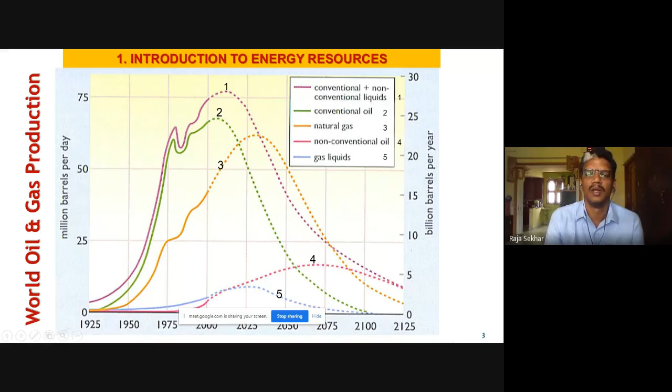As you can see in this graph, the purple line refers to the usage pattern for different years, spanning a century from 1925 to 2125. You can see that after 2000, there will be a decline in conventional usage because of the growing importance of alternate energy sources like renewable energy. And obviously the utilization of natural gas and other gas liquids will also be reduced in coming years as the global warming potential of the Earth is going to increase.

Coming to the consumption pattern, this is the global consumption pattern. Excuse me, sir.

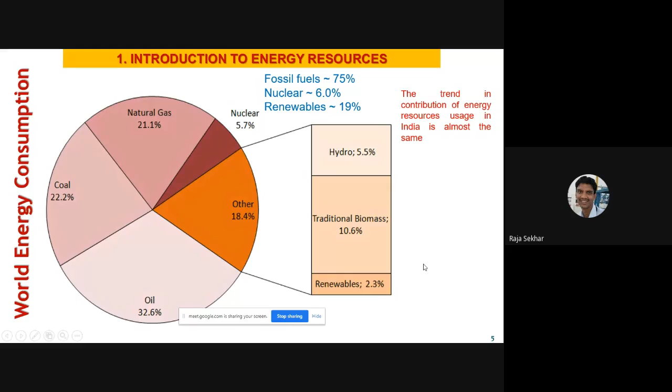Coming to the world energy consumption pattern, more than 50% of the energy is produced from conventional fuels. Around 32.6% is from oil, 22.2% is from coal, and 21.1% is from natural gas. So more than around 75% is from conventional sources. Around 5% is from nuclear, and renewables cover around 18.4%, which includes hydro, traditional biomass, as well as solar thermal and solar PV. The same usage pattern is followed in our nation also, with more than 60 to 70% coming from conventional power generation. That's why, since the last decade, the Government of India is trying to reduce coal consumption by encouraging renewable energy power generation through solar PV as well as biomass power plants, to save the carbon emissions released from different usage of conventional energy sources.

I want to specifically stress on the importance of solar energy in the global as well as the national context. This statistics has been taken from IRENA. This is the latest statistics published by them.

Looking at the installed capacity for the last decade, from 2010 to 2019, the trend of installation is going in an exponential way. The orange refers to solar thermal and yellow refers to solar photovoltaic. Most of the power generation is happening from solar photovoltaic rather than from solar thermal. I think you might understand the reason from Professor Reddy's words. There is a lot of scope for improvement in the commercialization of solar thermal power plants. There are some drawbacks which I will state in the rest of the slides. Majority of these installations, meaning majority of the power, is generated from solar photovoltaics.

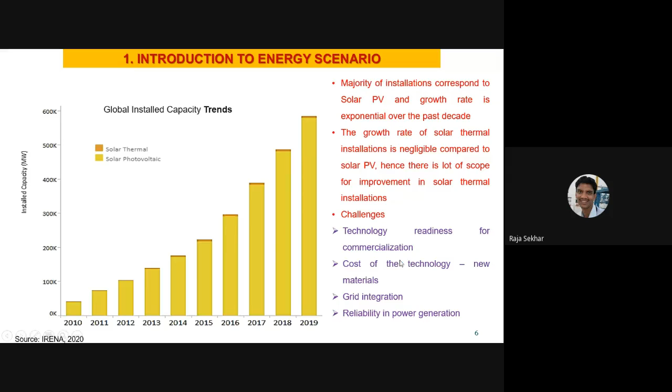Coming to the national installed capacity for India: in 2010, installation started, and by 2019 it really picked up because of various government policies. Solar photovoltaics in India also contribute more to power generation rather than solar thermal. On a global context, if you compare, India adds only up to 6% of the global total installed capacity during 2019. There is still a lot of scope for solar thermal installations to get commercial outlook.

In India, one of the challenges is that the amount of radiation falling from one location to another will change, and accordingly the physics of the system will also change. So we are yet to understand the physics of the system completely, in order to understand the generation capacities as well as the capabilities. There is a lot of scope for us to explore here.

So how can we exactly estimate this energy generation related to different locations of India? From Kanyakumari to Kashmir, there is a lot of latitude variation, and based on latitudes, the energy insolation will change. So how do these collectors behave for different latitudes? That has to be understood appropriately. I think that study is yet to start in India.

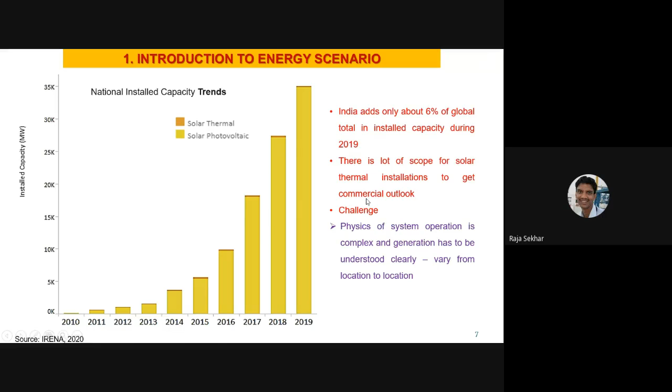Coming to global electricity generation trends, there is a consistent growth in the contribution of electricity from solar thermal power stations around the world. Some of the challenges here, as Professor Reddy also pointed out, are that energy storage is the biggest challenge, so along with generation, energy storage also becomes of primary importance.

There is no commercial energy storage technology which can be adopted appropriately for off-sunshine hours. So there is a lot of scope to work on energy storage to get cost-effective solutions.

Similarly, infrastructure components, design and development for transmission and distribution are also yet to develop. Why? Because the components used for a conventional grid are different from the components used for renewable-based energy generation. So there is yet to be a balance between this infrastructure requirement and the component design and development.

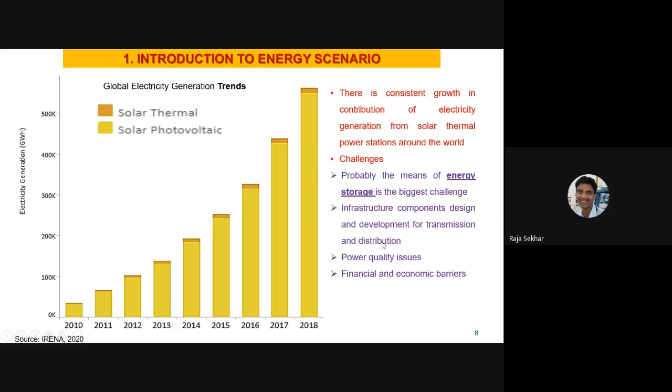Similarly, power quality issues can arise, and there is a financial and economic barrier, as these solar-based installations require a somewhat costly initial investment. The economic barriers are yet to be identified, and how to overcome these is a question. The Government of India and other federal governments around the world are encouraging renewables to some extent by providing subsidies, but people are not yet ready to adopt these technologies.

Coming to national electricity generation trends, during the past 5 years the growth rate is exponential. It adds to around 4% of the global total during 2019. You can see from 2017 to 18 there is an exponential growth in India.

Some of the challenges here are social and cultural barriers, and effective grid connectivity and integration to the conventional grid. The companies involved in power generation are slowly picking up, including our state-run organizations like NTPC and BHEL. Instead of building coal-based generation, they are now concentrating on building solar thermal or solar PV-based installations. BHEL, that is Bharat Heavy Electricals Limited, is now concentrating on the infrastructure that has to be built for the next generation of renewable energy-based power generation.

Then there is a lack of technology transfer from global industrial giants. As I said, only a few companies around the world are making these renewable-based technologies. If technology transfer takes place between companies, there is definitely a large scope for installing solar-based generation systems.

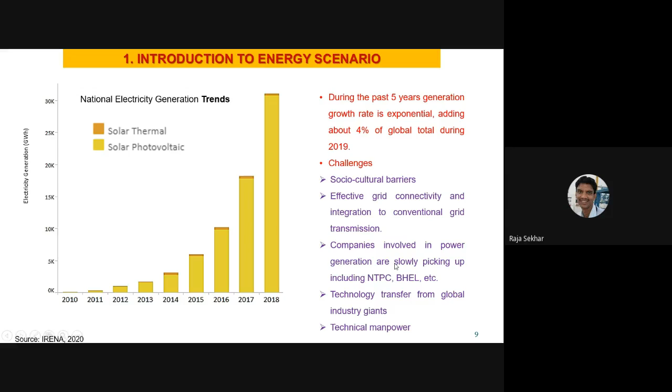Another challenge is the availability of technical manpower. You need trained manpower to operate these systems. Why? Because until now, training programs have been organized for conventional power generation. But for renewable-based power generation, you need more critical training so the plant can be operated without any hazards. This is one of the important aspects here.

Coming to the global job market for renewable-based power generation, from 2012 to 18 this is the data published by IRENA. You can see there is not much exponential growth; rather there is a slow growth.

So once these technologies are properly adopted, definitely I think there will be a large scope for the job market. So this job market for different energy sources has been listed here: hydro, wind, solar, biomass, and other resources.

Coming to only solar, you can see that the job market for solar PV is more compared to solar thermal. There are some ups and downs in the solar thermal job market because of the company's requirement, but however, the solar PV is constantly rising.

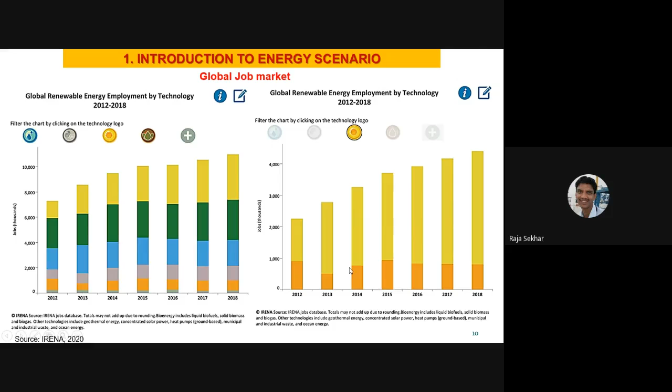Coming to the Indian scenario, India is able to give jobs for about 718.7 thousand graduates. Among that, solar is very less. So if these solar technologies have been appropriately developed for commercialization, probably this bar, that is solar heating and cooling...

This will also increase, and you can see that concentrating solar power is zero. In India there is no technical company which is commercializing concentrated solar power. If concentrated solar power had been given importance, this bar would have been in the positive direction.

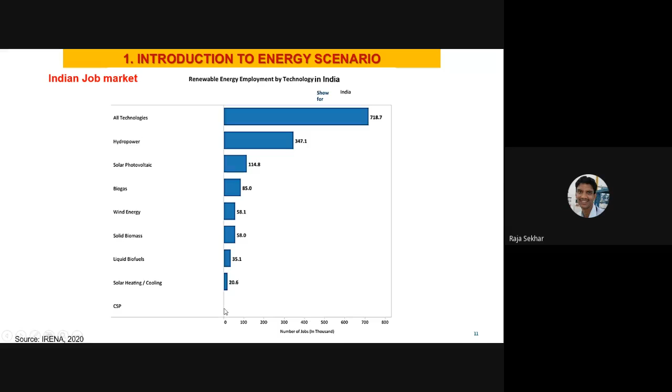Coming to the annual growth rate for the last 3 years, you can see that solar PV in 2018 was highest, and maybe during 2020 it got down due to this current pandemic. Wind is constant, with installations happening continuously, and bioenergy is also reduced in 2020 because of various reasons.

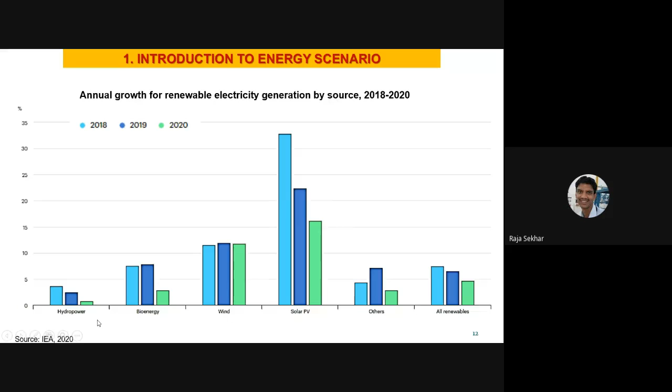Hydro also, since there are limited water resources in India, the market is slowly using whatever potential is there effectively. These are the statistics we can get from any source.

One major thing I want to stress here is that India is capable of producing 356,100 megawatts of energy in total, and from renewables it is around 123,040 megawatts. So still this gap between the conventional and renewables can be reduced by increasing the solar thermal installations.

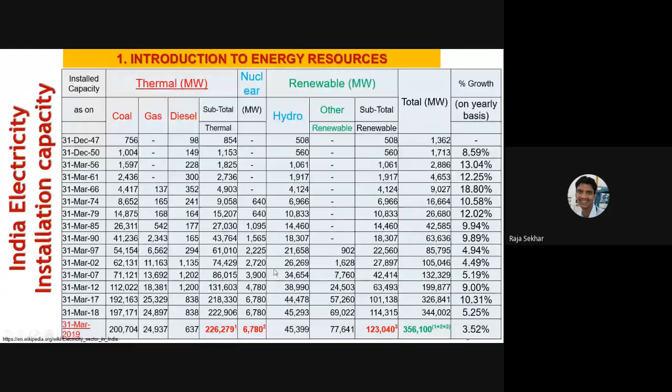Coming to the utilization of energy received, by different ways - this is in gigawatts, all the numbers are in gigawatts. We are receiving about 173 million gigawatts of energy from the sun, and out of which almost 1/3 is going back as reflective radiation in the form of shortwave radiation, which is reflected by clouds and whatever water is there in the atmosphere and the ice.

Most of that 1/3 is reflected in the atmosphere itself, and the rest, 2/3, the energy is transferring into many forms. Actually, whatever energy we are receiving, the same energy has to be radiated back, so that the Earth's atmosphere and surface temperature is maintained constant. If the energy we are receiving is not equal to the energy that is radiated, obviously there will be a change in the Earth's surface temperature, which is what is happening now.

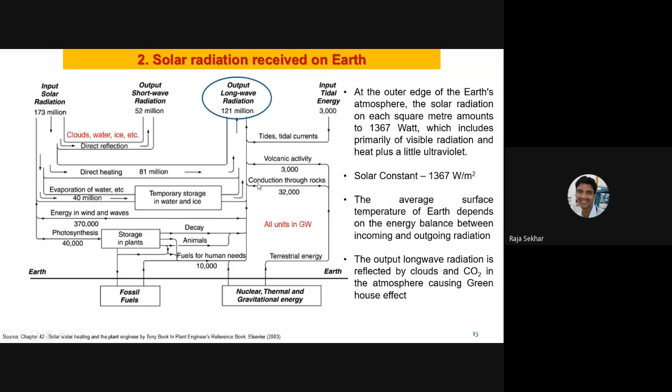Coming to solar thermal energy conversion, there are many conversion appliances. I will be concentrating only on the flat plate collector, which is a very useful application for water heating.

This schematic diagram explains the operating principle. This is the solar collector, which absorbs energy from the sun, and whatever cold fluid flows through it becomes hot, so you get hot water. The amount of energy absorbed depends on the area and the type of fluid sent into the collector. Basically, this collector converts incoming solar radiation into thermal form.

Another advantage is that it can use both beam and diffuse solar radiation. This is a stationary collector, so it does not require sun tracking, unlike concentrated systems. The construction of this collector is also very simple.

It is cost effective. In the morning session, some people asked if it is very expensive, but it is not. All state governments give enough subsidies to purchase these renewable devices, especially in Karnataka, where they provide almost 50% subsidy. So if you are ready to purchase this, they provide 50% of the installation cost.

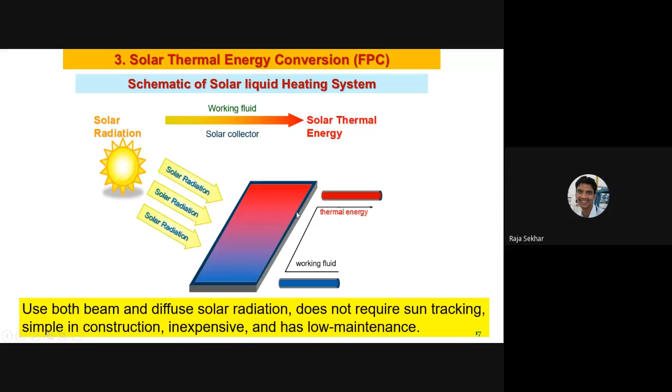Coming to the different components of this collector, there is a collector box made of metal, and the light blue colored parts are the risers, which are around 1 inch in diameter. There is a bottom header and a top header, and between these headers there are riser tubes.

The bottom header is where you get cold water, and whenever the sun's rays fall, there is an absorber plate. This absorber plate absorbs the solar energy and is coated black in color, since black surfaces absorb more heat.

The heat absorbed by the collector is given to the riser tubes, so slowly the water gets heated up. Because of this thermosiphon effect, the water moves into the top header, and then you can get hot water at the outlet.

This is connected to a storage tank, and there is glass over the whole system. The advantage of this glass is that it transmits short wave radiation but restricts long wave radiation. As mentioned, most of the incoming radiation is visible, some part is short wave, and the rest is long wave radiation.

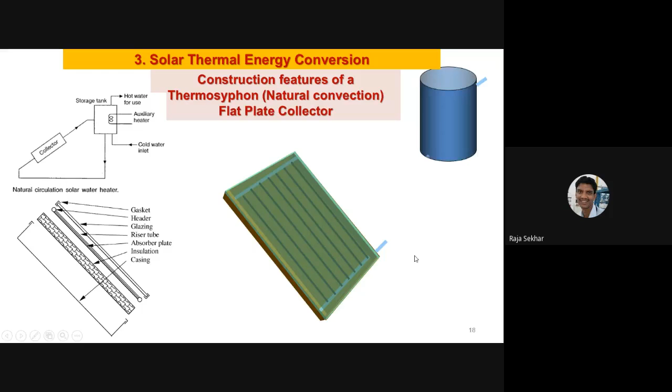What I have explained so far is about natural circulation, meaning the water passes through the collector by gravity. Another mode of operation is to have a pump at the bottom header, so that the water flows in a faster way.

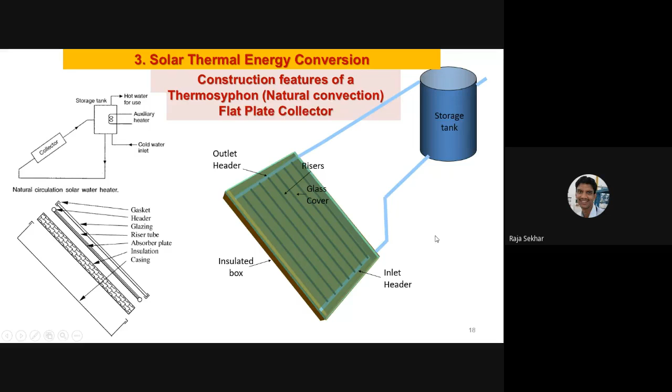And you have different absorber configurations also. So as Professor Reddy has told, there is transparent insulation. So this is how the transparent insulation will be there - there will be a gap between the glass and the absorber plate.

In between the glass and absorber, some transparent insulation is provided so that heat losses are reduced. Why is this transparent insulation provided? Because there is a temperature difference between the glass and absorber. The glass, since it is exposed to the outside environment, will be at a lower temperature. And since the absorber is continuously getting heat, the absorber plate will be at a higher temperature. Heat transfers from higher temperature to lower temperature, so there will be re-radiation happening from the absorber plate to the glass cover. To avoid that, transparent insulation is provided so that heat losses are reduced and heat transfer is improved.

So you can say that providing the transparent insulation over the absorber is also one type of passive enhancement. This is the standard flat plate collector, where insulation is provided on three sides, and you have a roll bond absorber. That means this absorber plate acts as a fin. When the fluid passes through this tube, the absorber plate gives heat to the fluid, and the fluid gets heated up.

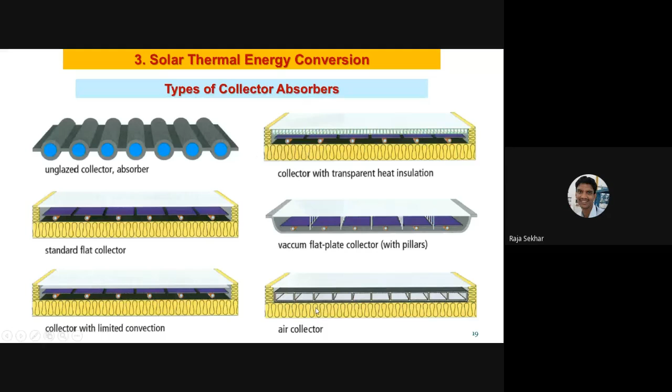Similar to water, we can have air also pass through this collector for getting hot air for drying systems. As I told, you can use a pump for circulating fluid so that it acts as forced convection. The advantage with forced convection is that in natural convection, the number of cycles the water passes through this collector is limited - it all depends on how the radiation varies.

So actually, this is a closed circuit, whether it may be forced circulation or natural convection - the whole fluid circuit is a closed loop. So whenever this cold water gets heated up, that means some mass of water has been pushed from this collector, and the same amount of mass will come and occupy the fluid inside the collector. That's how the natural convection works.

However, in this forced circulation mode, the pump forces the fluid to pass through the collector. So the advantage here is that the number of times the fluid comes in contact with the collector will be more. So you can ask one thing - whether you will be getting a higher temperature at the outlet.

Definitely not. Why? Because the time that the water is retained in the collector is less in this forced circulation. That means the fluid passes very fast through the collector tube, so the time available for heat absorption is somewhat less. That's why the collector outlet temperature is less in forced circulation compared to natural convection. However, if you want to heat more amount of water within less time, then definitely this forced circulation will be used.

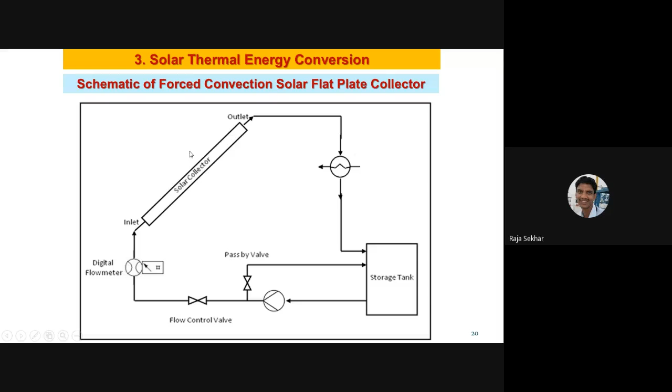So on what factors does this efficiency depend? One of the factors is the incident solar radiation. As I said, the input that you are giving to the collector will play an important role. You know that efficiency is output by input, so as your input varies, your output will also vary.

To find out this efficiency, you need to know what is the radiation falling over the collector. You can do that with the help of meteorological parameters like ambient air, wind velocity, average temperature over that location, rainfall and other aspects. If you have a weather station, you can take the data of a few years and come up with the radiation possible over that location. Based on that, you can find out what the efficiency is.

So the data, whatever you collect, you can develop a regression equation based on the ambient temperature, wind velocities, rainfall, and other things, and you can easily get what is the radiation possible over that location. So the difference between this incident radiation and the useful energy is the amount of energy lost to the atmosphere.

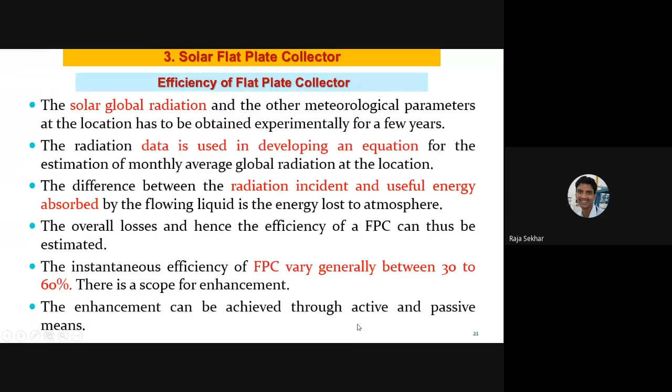Coming specifically to passive augmentation techniques, a few techniques are listed here. There are many, but a few which we are working on are listed. So altering the thermo-physical properties of the working fluid - basically the mode of heat transfer happening in the collector is convective heat transfer, that is MCP delta T.

So that CP, if you change it - CP is nothing but the amount of energy you can gain by raising the temperature of fluid by 1 degree. So if you are able to raise the CP of water, more amount of energy you can retain. For that, you can take the help of nanoparticles.

I think in the morning somebody asked whether nanoparticles can be used for enhancing the efficiency. Yes, definitely, so this is what I am going to cover in the further slides. We can use the nanoparticles by developing the nanofluids, using different nanoparticles to develop different nanofluids.

You can use the fluids either in laminar or turbulent flow. Laminar corresponds to natural convective heat transfer, and turbulent corresponds to force circulation. There are a lot of drawbacks of using these nanoparticles in laminar conditions, because basically the density, viscosity, and other properties will change. Because of which, in a laminar condition, there may be a possibility that the rate of fluid flow can reduce.

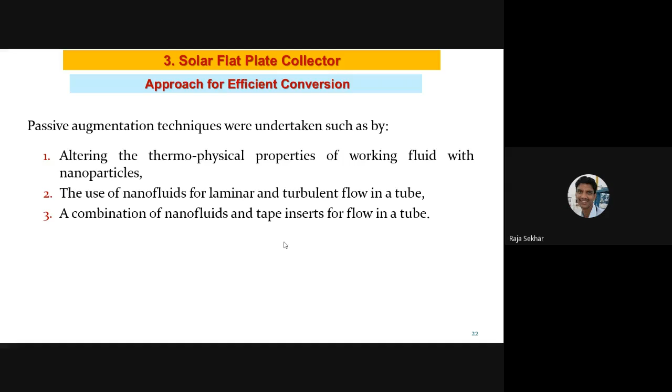A combination of nanofluids as well as other passive techniques, like putting tapes into the flow, is also a good idea to improve heat transfer. If you put a tape, the flow circulation will change. If you take a plain pipe and send fluid, it goes in a straight line, whereas with tape inserts, based on the shape of the tape, the fluid circulation will increase, and there is a possibility that the tube surface can provide enhanced heat transfer to the flowing fluid.

Coming to the first part, that is parametric analysis of the flat plate collector. We have studied the influence of different operational parameters on the efficiency of the collector. Wait a minute, I will have some water.

The solar radiation passes through the glass cover at an inclination to the surface. At one particular location, if you change the inclination of the collector, the influence of this inclination on collector performance is studied. Then the amount of energy absorbed by the collector absorber plate, and the energy transferred to the flowing fluid, under thermosyphon and forced convection modes.

Usually the plate temperature is greater than ambient. So for different plate temperatures and different ambient conditions, how the performance will change was studied. There are already established equations, and we modified those equations slightly for our requirement. Also, for different ambient and wind conditions, if the collector is exposed, what will be its effect. Then what happens if the spacing is changed?

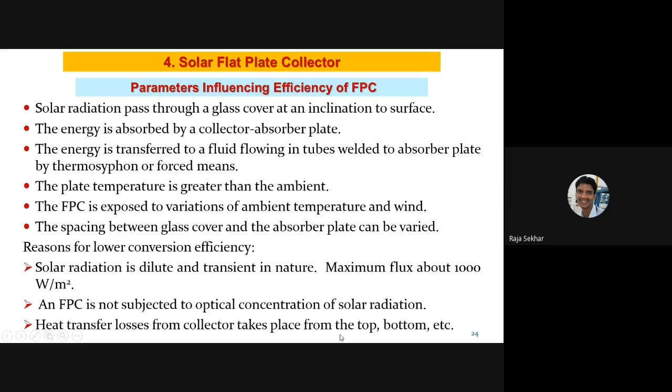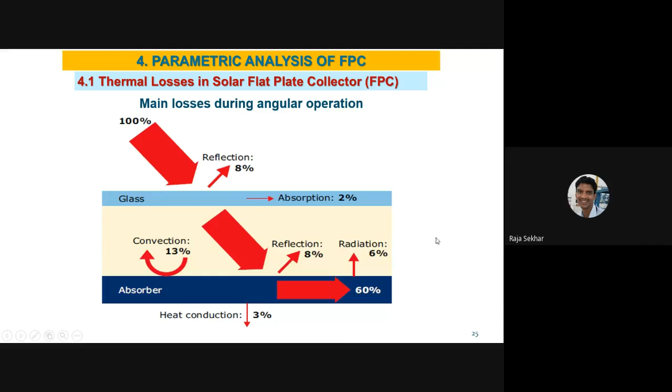So corresponding to all the losses, the efficiency of the collector is somewhat reduced. These are the different modes of heat transfer happening in the collector.

Q sun is the incident heat energy received on the collector. Some of the heat is emitted, some is lost due to wind flow, and some loss happens because of conduction. So different losses are there - conductive, convective, and radiative losses happen because of various reasons.

For conductive loss, though you provide proper insulation, you may not say it restricts 100% of the loss. Some convective losses happen because of the air presence between the glass and the absorber, and radiative losses happen from the absorber to the glass. So different losses happen, and we need to find appropriate ways to reduce the heat loss.

Basically, our aim has to be to transfer the heat that is absorbed by the absorber plate to the fluid. That means you need to maintain the absorber plate temperature as low as possible, so that you can get the heat transferred to the fluid.

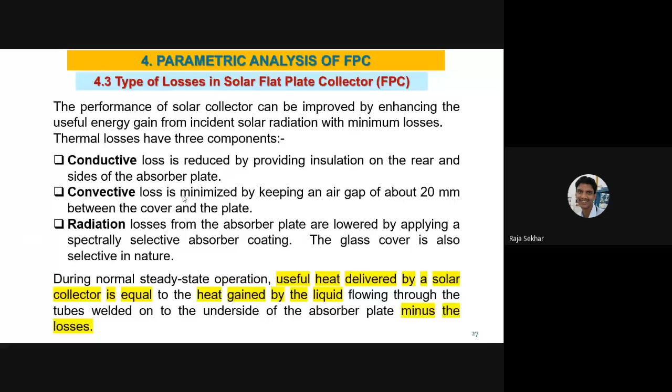If you use these passive enhancement techniques, it should result in lowering the plate temperature for the same condition. Let's say you have one reference flat plate collector and another flat plate collector including these enhanced techniques. If you compare those two, the absorber plate temperature of the reference should be higher, and since you've incorporated passive enhancement techniques, the absorber plate temperature will be somewhat lower than the reference. Why? Because more heat has been transferred to the fluid, so the absorber plate temperature has been reduced. That is our main objective.

So we can understand this energy balance of the flat plate collector. These formulas are already available in many textbooks. Q useful is the amount of heat absorbed by the fluid - the useful heat delivered by the collector - and S is the amount of energy absorbed by the absorber plate because of the incident solar radiation. As the area of the absorber plate increases, more heat can be absorbed, so your collector performance also indirectly depends on the area of the absorber.

QL is the heat losses occurring because of various modes of heat transfer like convection, radiation, and other things. At the denominator of this efficiency, you have the incident solar radiation, which you can calculate using this formula. Since the surface is not horizontal but inclined, you have so many other components coming into the picture. The solar flux absorbed by this inclined surface is given by this formula.

We have this tau alpha coming into the picture - tau alpha is nothing but the transmittivity and absorptivity of the collector. If you want to find the instantaneous efficiency, that means at one particular instant keeping all parameters constant, it is given by this formula: QU by AP into IT. The area of the absorber plate is constant, however your QU and the incident radiation will change according to the different operating parameters.

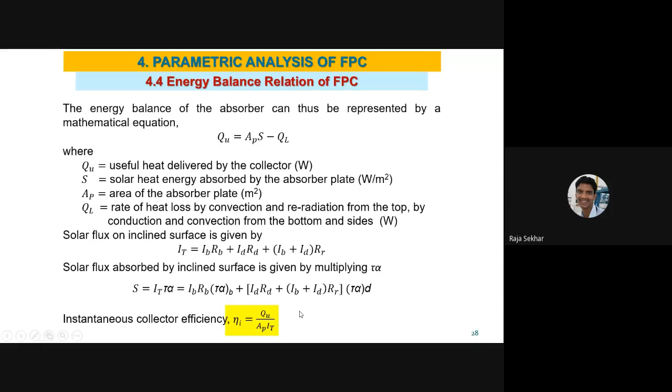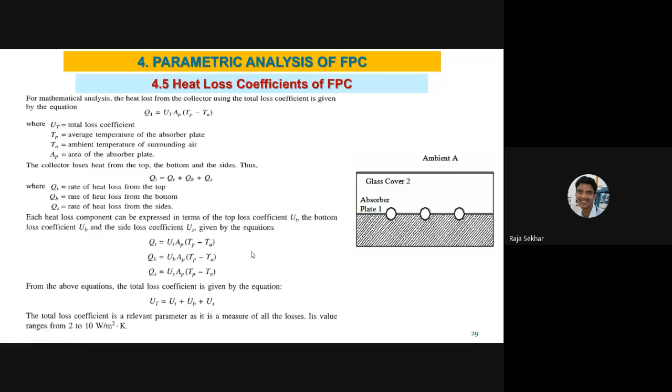Coming to these heat losses happening because of various reasons, you can use the appropriate equations to find that out. I'm not going into more details, as these are already available in the respective textbooks.

So what we have done is consider the main important influencing parameters that cause change in the practical performance. The parametric collector absorber plate temperature has been varied from 310 to 390 - these values we got from reference papers, where people have experimented and identified that the absorber plate temperature can be in this range.

Ambient temperature, based on our local conditions, we have considered this as the average ambient temperature. Absorber plate emissivity we have changed from 0.05 to 0.95. Why this change? 0.05 means we have some proper selective coatings where the emissivity of the absorber plate is reduced to 0.05, and 0.95 is the emissivity of an absorber plate coated with normal black paint - whatever commercial paints you get, if you paint it, the emissivity will be 0.95.

With selective absorber coatings, emissivity comes around 0.05. Usually black bodies absorb and emit more, so you need to appropriately change the properties of the paint such that emissivity is reduced to around 0.05. This emissivity has also been prescribed by the Bureau of Indian Standards. The glass cover emissivity is usually 0.88 because of the material property, and this we cannot change. The angle of inclination we have varied from 20 to 80 degrees, and we have considered both one and two glass covers.

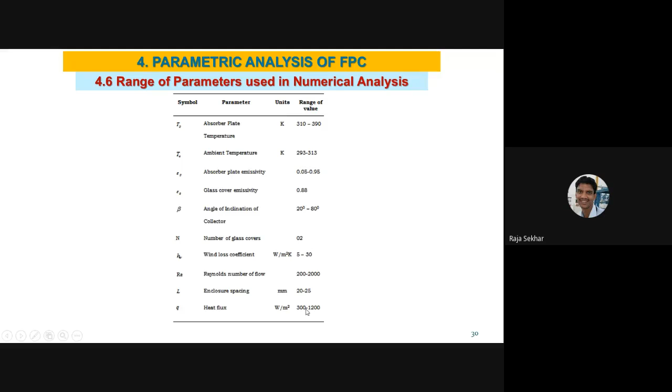These are the results. But before that, we had to do some validation to check our numerical code. So we developed a numerical code and validated it against available experimental data.

We varied the emissivity of the plate from 0.05 to 0.95. When we applied our own experimental data, which we performed ourselves, the emissivity came out close to 0.1 to 0.05, which implies that the coating provided to the collector is a selective coating.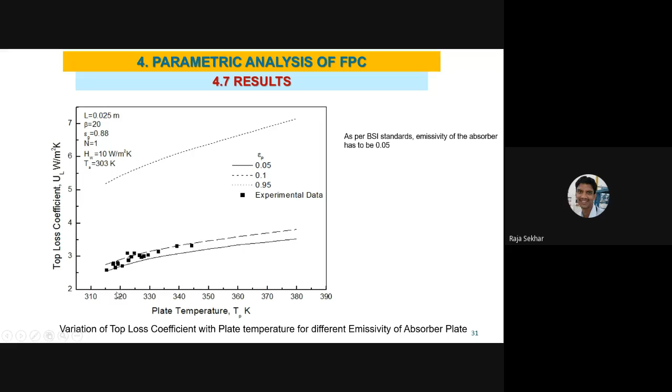From this graph, you can see that the higher the emissivity of the absorber, the higher the top loss coefficient will be. As shown in the previous equations, this top loss coefficient U is the major contributor to losses. So the more the emissivity of the plate, the more the losses. One criterion is that the emissivity of the plate should be as low as possible to reduce the top losses. We cannot make it zero, but we can reduce it to a maximum extent. Whatever the plate temperature, the losses will be reduced if the emissivity is low.

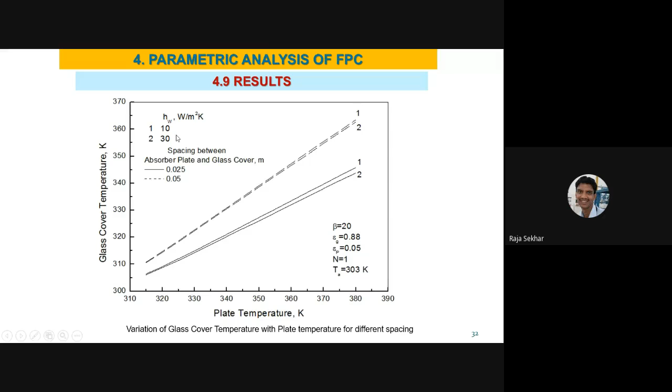We also studied what happens if the spacing and wind loss coefficient change. We can see that for 0.025, that is a 25 mm gap, the losses are reduced. If you increase the spacing, the losses increase. Similarly, we can see that losses are lower for lower wind loss coefficient (h_w).

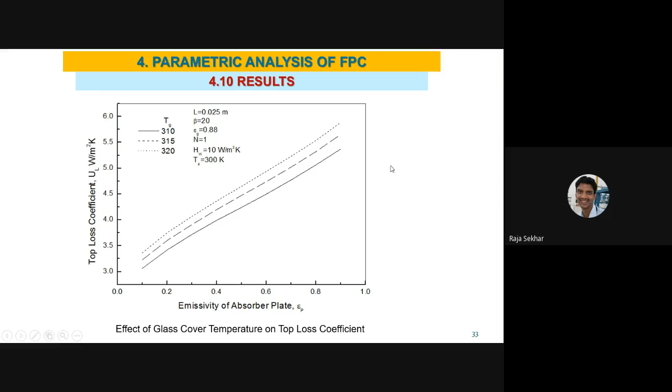Similarly, for 20 degrees inclination, glass emissivity of 0.88, and one glass cover, with ambient temperature of 300, if the glass temperature is varied, what happens to the loss coefficient? You can see that if the glass temperature is lower, the losses are less. If the glass temperature is higher, the losses from the top are more. The reason is that if your glass temperature is higher, the wind will try to take away the heat from the glass, so more radiation will come from the absorber to the glass. If you maintain a lower glass temperature, the possibility of losses is reduced.

Similarly, for different plate temperatures, you can see that if the plate temperature is lower, around 315, with ambient temperature taken as 303, then if the temperature difference between ambient and plate is less, the losses are less. But this condition cannot always be attained, since the temperature difference between ambient and plate will usually be more than 20 or 25 degrees, because of the material property of the plate.

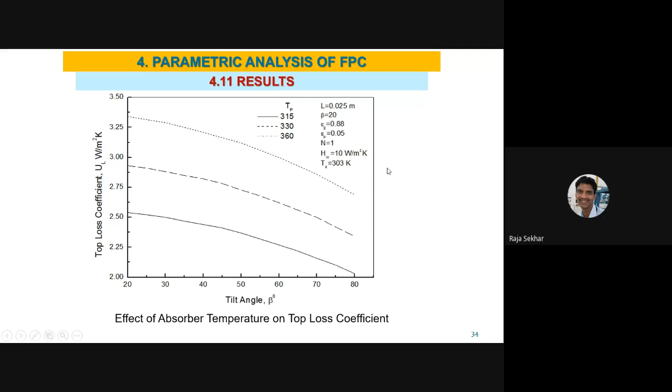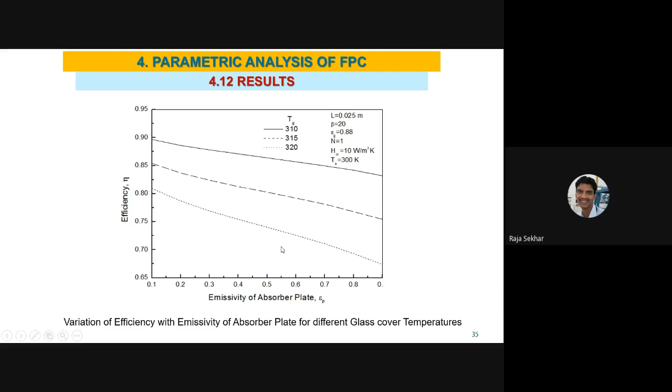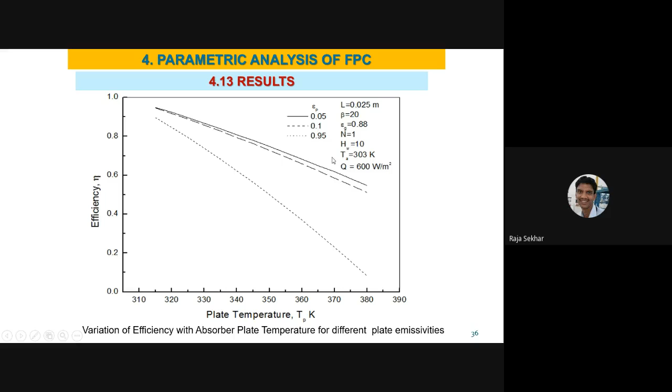Similarly, how does efficiency vary for different glass temperatures? You can see that if the glass temperature is maintained higher, efficiency is lower, and if the glass temperature is maintained lower, efficiency increases. For different absorber plate emissivity, the lower the emissivity of the absorber, the higher the efficiency. Similarly, we also studied the case of changing plate emissivity: the lower the emissivity, the higher the efficiency for different plate temperatures. So like this, we have studied various cases.

I think the time is now 12:44, and there are many more things to discuss. May I know up to what time I can go for?

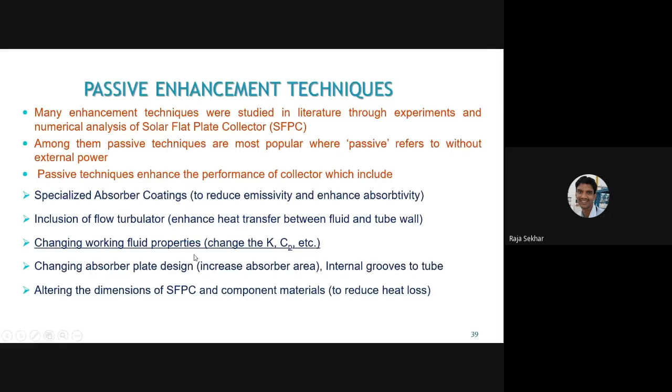As I said, you can use nanofluids as the working fluid. One drawback of using nanofluids is that, though you increase the heat transfer rate and efficiency of the collector, you obviously have to go for a heat exchanger type storage tank, because you cannot use nanofluids for bathing or cleaning utensils. Whatever heat is gained by the nanofluid has to be transferred into the water in the storage tank, and only that storage tank water can be used for normal purposes. So the other requirement for using nanofluids as working fluid is that you have to go for a heat exchanger type storage tank.

Whereas in a normal collector, the water you use flows over the collector directly. But since the heat transfer rate of water is lower than that of nanofluid, using nanofluid can improve the efficiency of the collector. We can use different types of nanoparticles like Al2O3, SiO2, copper oxide, copper, and other particles for preparation.

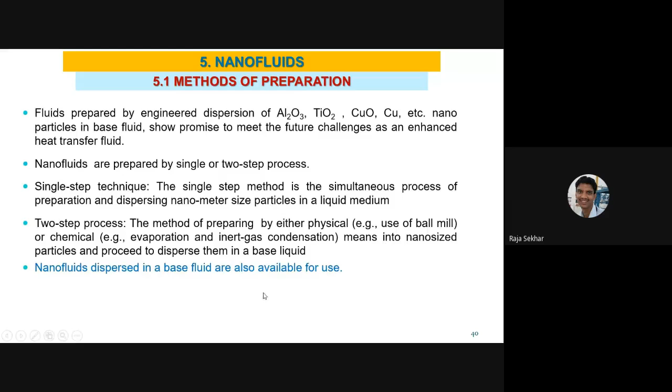You can prepare these nanofluids by either a single-step or two-step process. I think I am losing time, so let me just go through it. This work was conducted along with my collaborators in Malaysia, where the actual experimentation happened. They prepared different SiO2 concentrations.

This is very important: while preparing nanofluids, you have to compromise between thermal conductivity, density, and specific heat. If you go for copper, it has a specific heat of 386, but its density is 8,954. However, for SiO2, the specific heat is 745, almost double, but its density is about 4 times lower, at 2,220. However, if you compare thermal conductivity, copper is 383, whereas SiO2 is only 1.4.

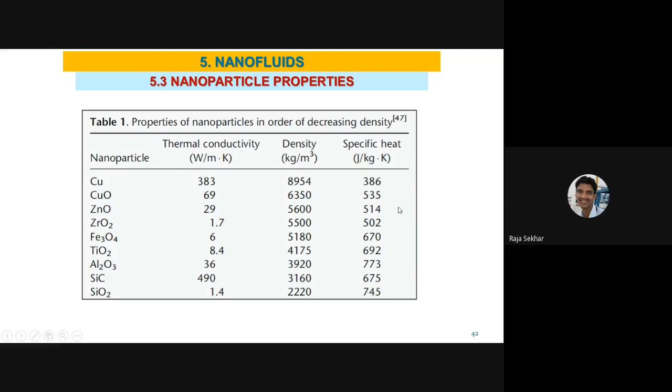What I want to stress is that if you want to prepare your nanofluid, you can use a small amount of copper to get more heat transfer because its thermal conductivity is higher. However, if you want to use SiO2, the concentration has to be more, because its thermal conductivity is lower, but its specific heat is higher, meaning it can store more heat, but the heat transfer rate is lower, so you need more SiO2. On the other hand, based on density, the more the density, the more the viscosity. So you need a compromise between all three properties while choosing your nanofluid.

You can estimate the properties using these established relations. Along with the collaborators, we finalized these parameters based on standard deviation, checked with other literature data, and finalized these regression equations. Thermal conductivity depends on phi, the volume fraction of nanoparticles added to the fluid, the temperature of the fluid, the diameter of the particle, and the thermal diffusivity. Alpha P is the thermal diffusivity of the particle relative to the thermal diffusivity of water.

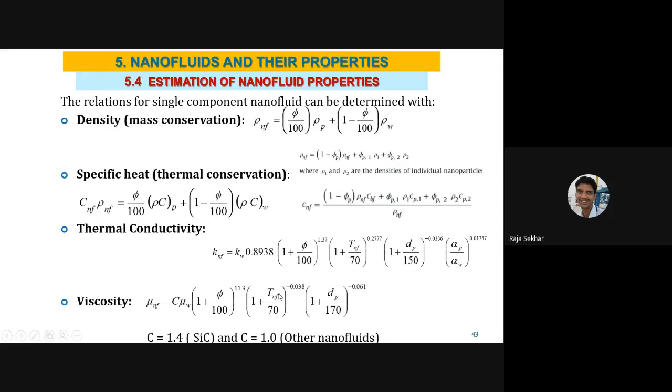Coming to viscosity, here also if the diameter of the particle is more, there is a possibility that viscosity may increase. And the temperature, obviously, if the temperature is higher, the viscosity will be lower.

Some of the considerations that people have taken are: nanofluids are Newtonian in the low volume concentration, and thermal conductivity increases with concentration and temperature. Viscosity increases with concentration, and it will obviously decrease with temperature. Specific heat and density of nanofluid are determined based on law of mixtures.

So I have a few questions so that you can understand it better. I think I have shown some equations, so we can just get answers for ourselves. What are the nanofluid properties which are dependent on particle size? Maybe I will share this PPT later to the organizers, so they will give this PPT to you, and later you can find out the answers for these questions.

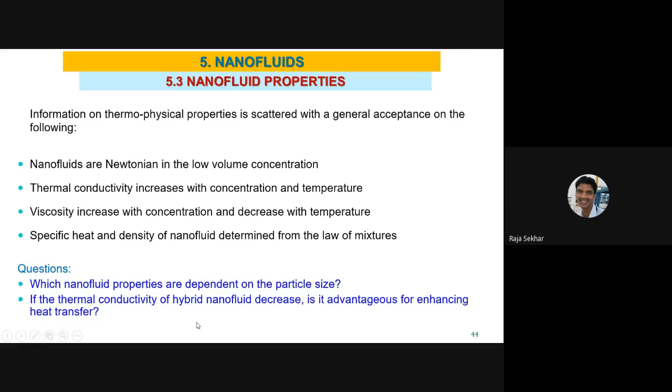What is the effect of nanofluid under natural convection? As I said, there are very few studies people have done on this enhancement of natural convection with nanofluids. What people have identified is that when the nanoparticle is added, the heat transfer rate is decreasing in natural convection mode. Usually, if you add nanoparticles, people have a wrong view that the heat transfer will enhance.

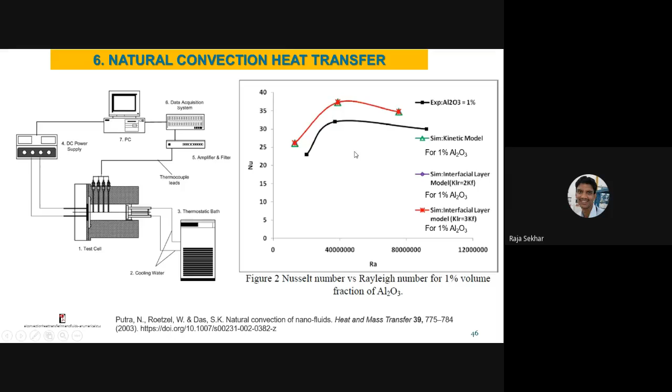Also, you can see this is the trend for experimental values. It is from 20 to 30 for 1% volume concentration. For 4%, you can see that it is further reduced. So the more the concentration you add in natural convection, the Nusselt number or the heat transfer rate is decreasing with increasing particle concentration.

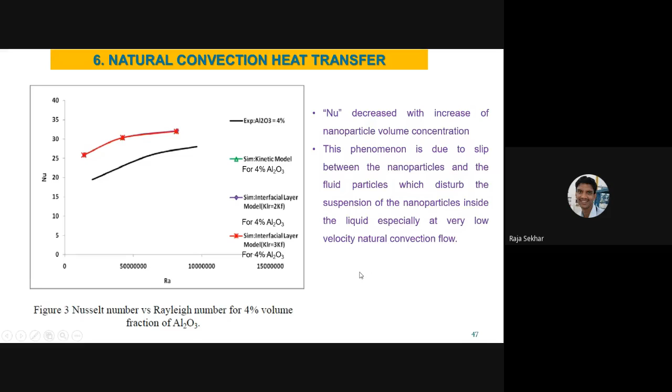The reason that people have told is due to the slip between the nanoparticles and the fluid particles, which disrupts the suspension of nanoparticles inside the liquid, especially at very low velocity happening under natural convection flow. Similar tests have been conducted by many researchers.

Using not only Al2O3, but also multi-walled carbon nanotube based nanofluids, they observed the same trend by increasing this concentration.

This is done on a real flat plate collector. They have identified that the efficiency is increasing, but we cannot compare this efficiency with the heat transfer rate when you are using these nanofluids.

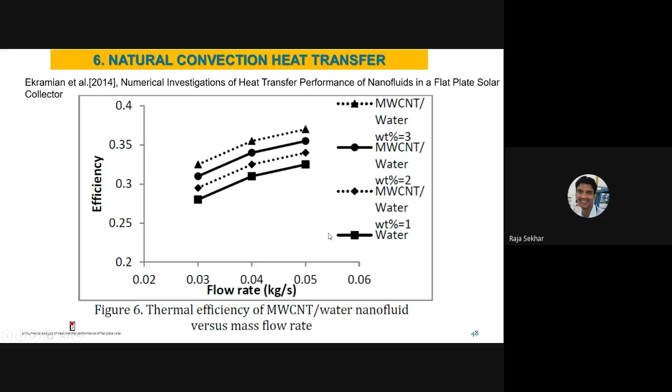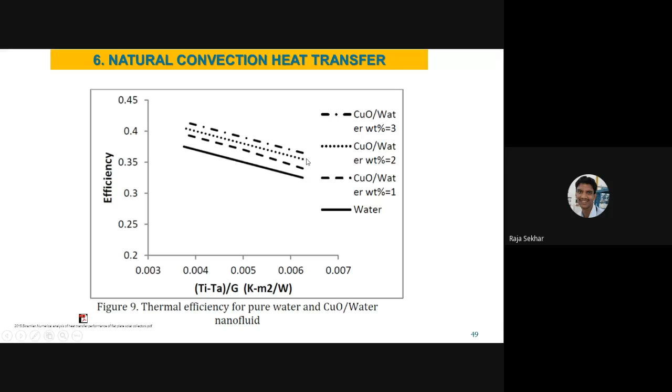They have done it for CuO-water also, and they identified that the efficiency is increased with adding more nanoparticles, but not the heat transfer rates. They have done this for Al2O3 also. So there is a small variation between the change in efficiency, but definitely the efficiency of the collectors changes.

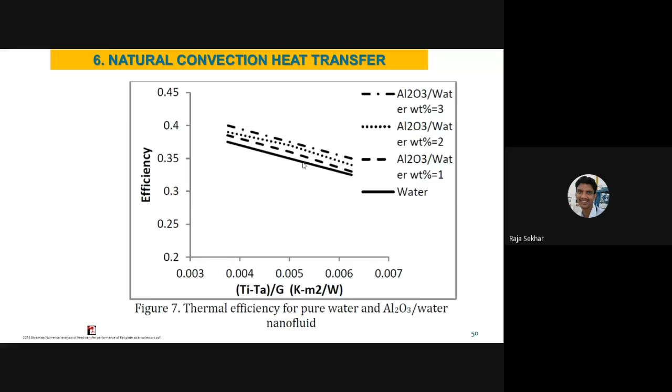So, yeah, this is for natural convection heat transfer only, not turbulent.

One of our collaborators has done this work, and he made a test section having a heating chamber on one side and cooling chamber on the other side. This is the test section in which the fluid is sent under natural convection, and they identified what will be the effect of this.

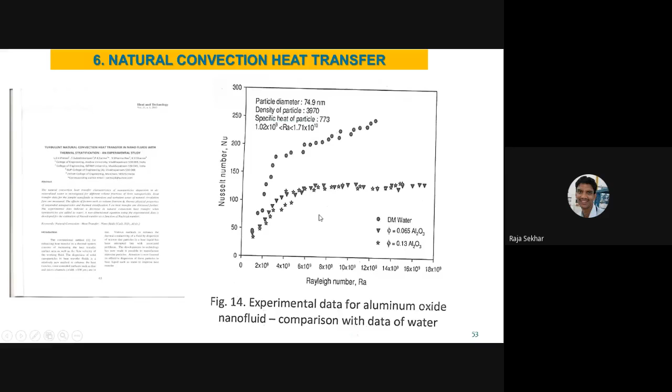They made a set of experiments and identified that water has a higher Nusselt number compared to the nanoparticles. Here you can see these circles are for water, and triangles and star ones are for nanofluid. They observed the same thing: compared to water, the heat transfer rates are reducing with adding nanoparticles to the base fluid under natural conditions. The same trend is observed for TiO2 also.

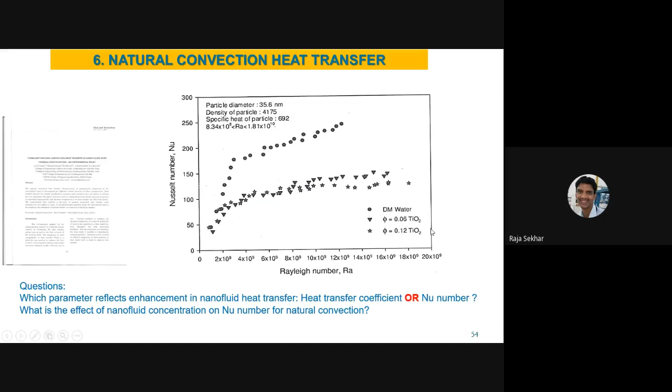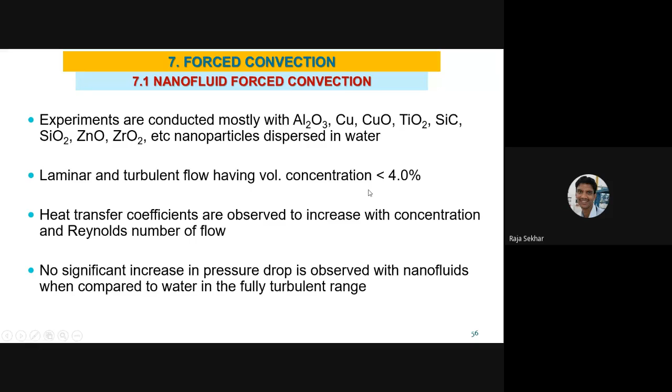So coming to this forced convection, people have done the same fluids for Al2O3, copper that have been used for natural convection. One important thing you have to understand is that if the volume concentration is less than 4, then only the heat transfer rates are good. More than 4, you should not prefer it, so why, I will tell you.

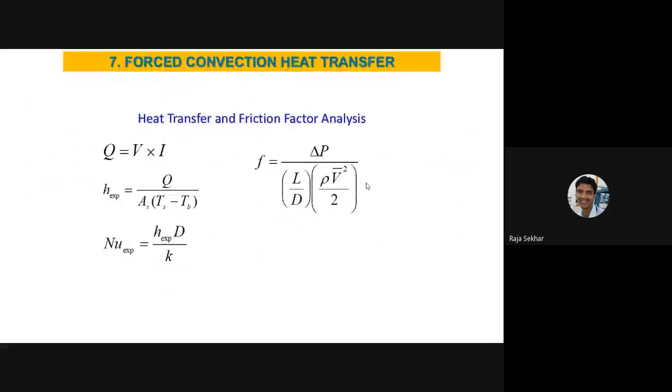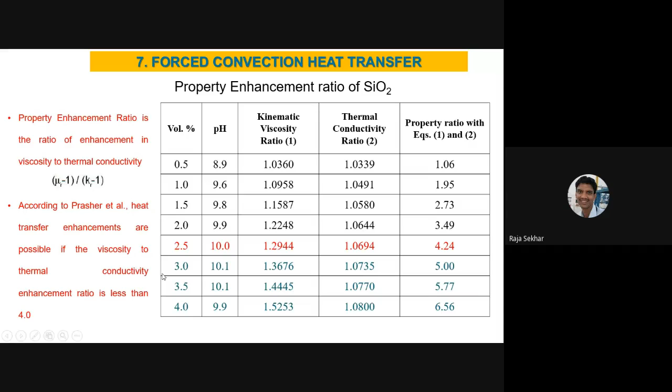So according to this order of magnitude analysis, Prasher and other authors have told that heat transfer enhancements are possible if the viscosity to thermal conductivity ratio is less than 4. So if it is more than 4, you should not prefer these nanofluids for enhanced heat transfer. This has been summarized based on different experiments conducted by people. Sorry, that it has skipped.

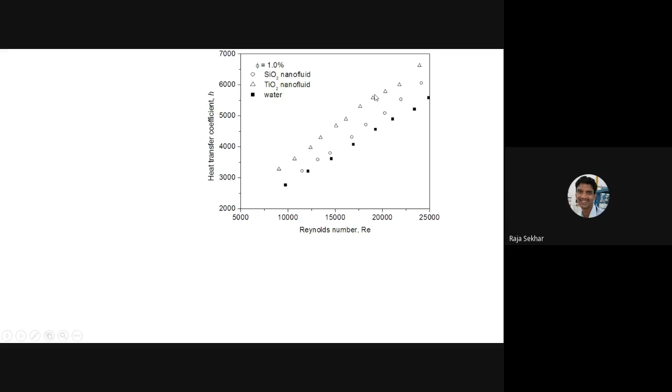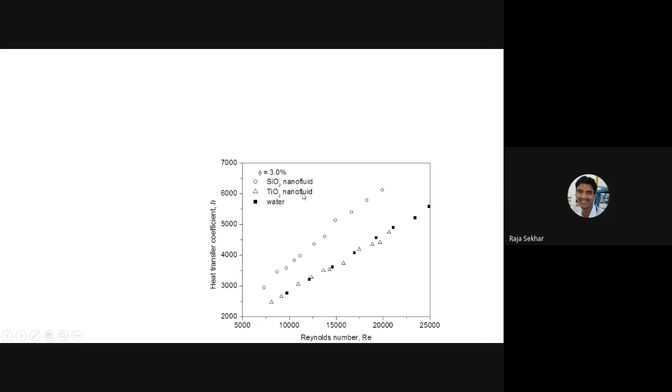Similarly for 3%, whether it is only for 2% or not, we have tested, but for 3% also it is showing the same thing. That means TiO2 is having the same heat transfer rates as compared to water, but SiO2 at 3% also is giving better enhancements. So if you want to prefer SiO2 and TiO2 for different concentrations, you can use this data for the respective application. Generally for laminar conditions and all, you can use it in electronic cooling equipment.

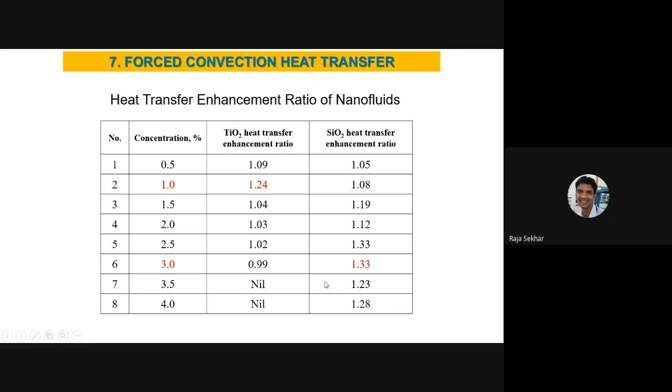Coming to this enhancement ratio, you can see that up to concentration 1%, the enhancement ratio is 1.24. More than 1%, you can see that the enhancement ratios are getting reduced. Similarly for SiO2 up to 3%, it is okay, but more than 3%, SiO2 is not preferred because the enhancement ratio is falling down. You can use these twisted tapes along with nanofluids for enhanced heat transfer.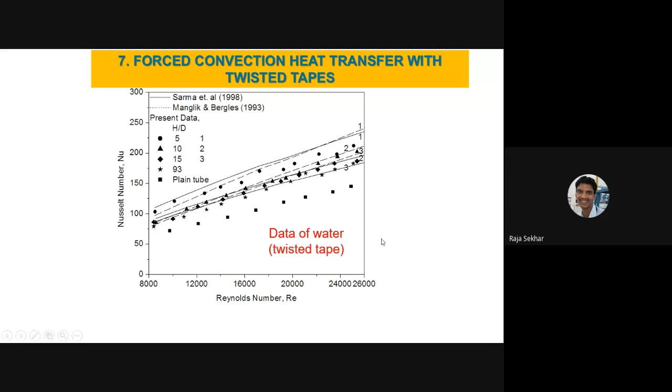So maybe I'll summarize this with a table because of lack of time. I have more things to show, but yeah. So here you can see that for 1% concentration or twist ratio 5. Let me show you that twist ratio.

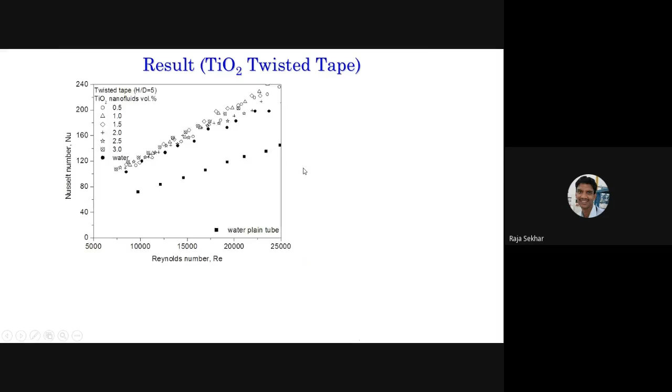So H by D, H is the distance between one twist, and D is the diameter of the tube. Since we are taking a cylindrical tube, we have diameter. If you have any other cross section, you can calculate this hydraulic diameter, and correspondingly find the h/d ratios. These are the different tapes that you can insert. So h/d ratio 93 means it is almost plain. Lower the h/d ratio, the higher will be the number of turns. What will be the effect of these turns on heat transfer has been studied.

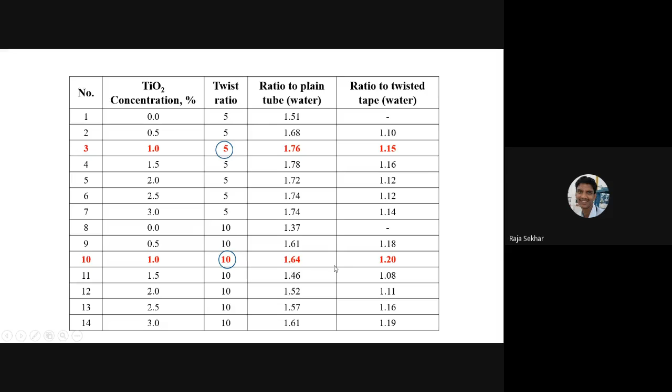I will show you that summary table so you can easily understand. This is for TiO2 with twisted tape. If you are having a twist ratio of 5, at concentration 1%, you are getting the highest enhancement. Similarly for twist ratio 10, at 1% concentration you are getting the highest enhancement ratios, while for others it is lower. Similarly for twist ratios 15 and 93, where 93 means almost a plain tape, at 1% concentration only you are getting the best result. I think in the earlier slide I showed that for TiO2, 1% is the effective one.

So for that 1% only you are getting the highest enhancement ratios. Similarly for SiO2 we have seen that 3% is good. The same is shown in this table. For 3% only you are getting the highest enhancement ratio. That means in the actual application also, the 3% SiO2 is giving you better enhancements.

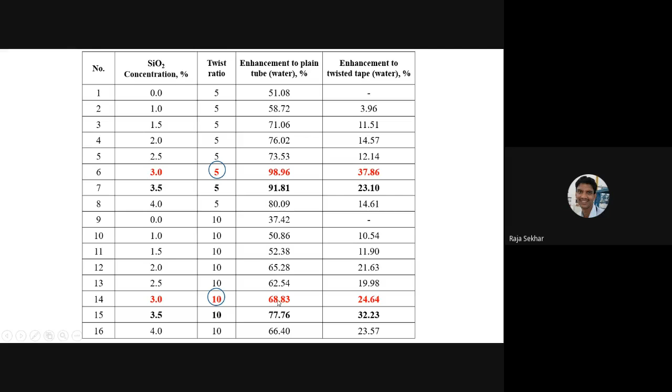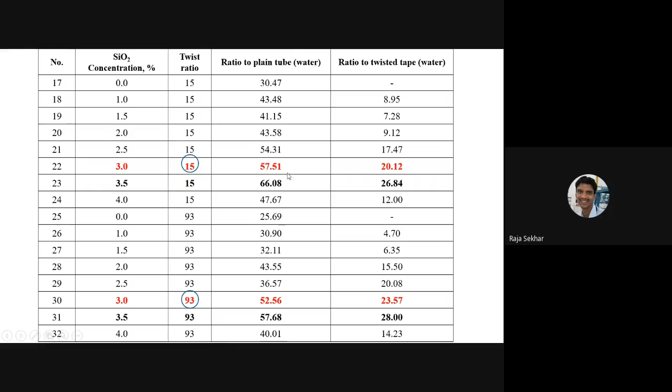This is for 5, this is the enhancement ratio. So that means for lower twist you are getting better enhancements. For 5 it is 98 and for 10 it is 68. If you look at for 15 and 93 also, it is somewhat reduced. So here it is 98, 68, 57 and 52. So the more the twist ratio, the enhancement ratio is reduced. So you have to go for lower twist ratios and up to 3% of SiO2 concentration to get better results.

Based on this, some generalized regression equations for heat transfer are done. I think you can go through some literature papers published to get that.

Similarly, for friction factor also, one of the drawbacks of using twisted tapes is that the friction factor will increase, right? Because you are adding obstruction to the flow. So what happens to the friction factor is also studied, and correspondingly the regression equations for different nanofluid concentrations have been obtained.

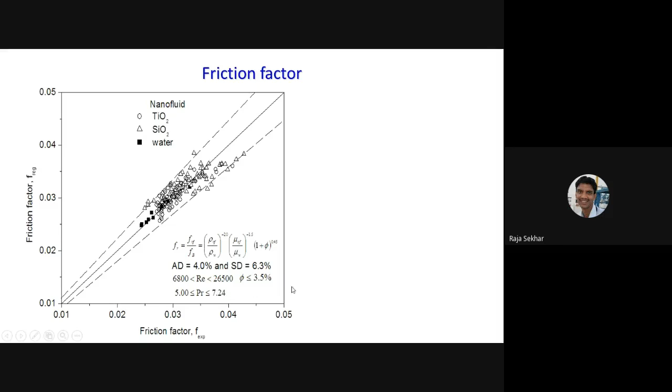And for a different Prandtl number ratio, Prandtl number 5 to 7. This is for water, that is why Prandtl number ratio is 7.

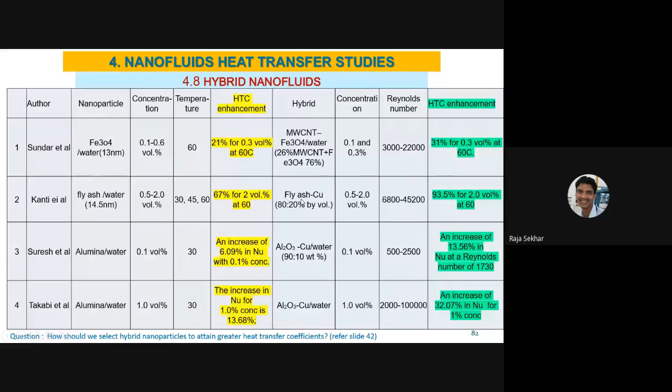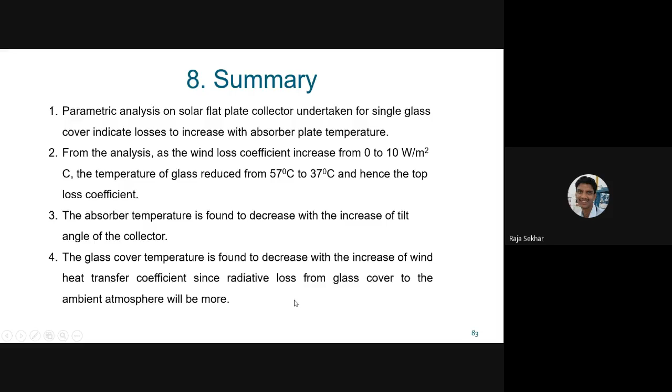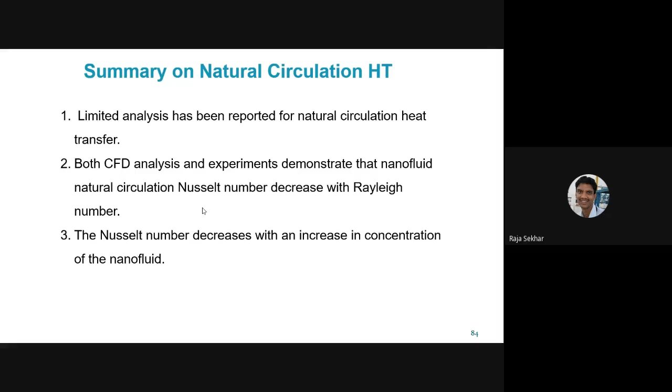The glass temperature cover is observed to decrease with increase in the wind heat transfer coefficient, as it is obvious that the more the wind, the more the heat loss from the cover to ambient will take place. And there is a limited analysis reported on natural convection heat transfer with nanofluids, so there is a lot of scope for young people to do more analysis on this natural convection heat transfer with nanofluids. Both CFD and experimental investigations demonstrate that nanofluid natural convection heat transfer will reduce the heat transfer rate with increase in the concentration of the nanofluid.

Coming to forced convection heat transfer, viscosity and thermal conductivity play an important role in heat transfer rates. You should not go beyond a certain concentration of nanofluid, otherwise it goes to waste. There is no significant influence of particle size observed on heat transfer. Though there is a change in the properties of the fluid, the influence on heat transfer rates is found to be negligible.

Under forced convection, surface temperatures are observed to be lower when nanofluid is used instead of water. Some enhancement in heat transfer rates for forced convection, but not for natural convection, has been observed. The values of friction factor with nanofluids under forced convection are higher because of the change in their density and viscosity values, which is about 5 to 15%.

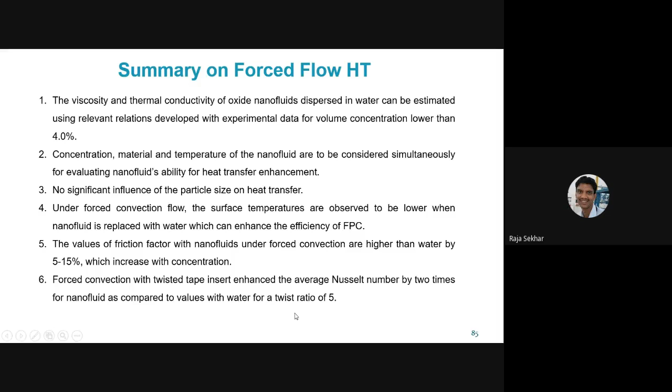Forced convection with twisted tape enhances the average Nusselt numbers by 2 times for nanofluids compared to water, having a twist ratio of 5. That means you should have lower twist ratios so that the enhancement in heat transfer is good.

I hope I have completed my presentation. If you have any doubts. There are some few references also listed which you can refer to. And I thank the organizers for giving me an opportunity to present.